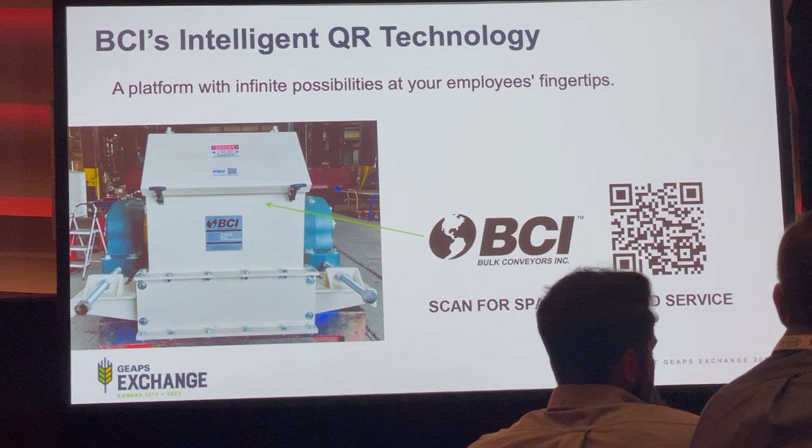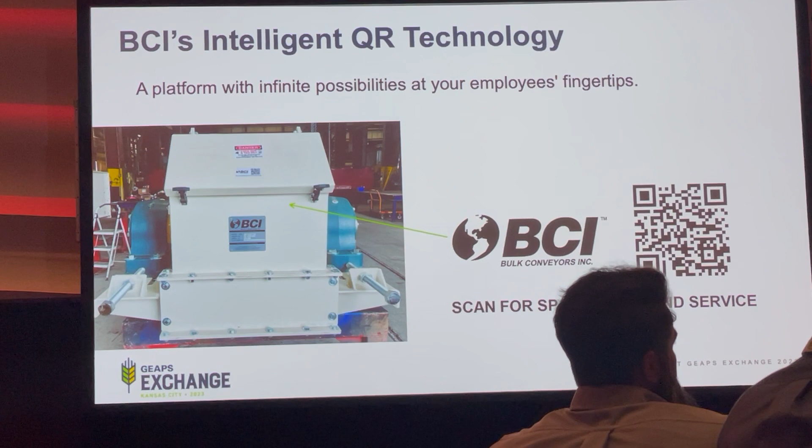Who hasn't seen a QR code recently? You're going to get inundated with them this week because every time you attend an ed session, go to the exchange floor, or leave this room today, there's going to be a QR code for a survey. We see them in restaurants, at the movies, and when we get our IKEA furniture, and that QR code takes us right to the assembly instructions.

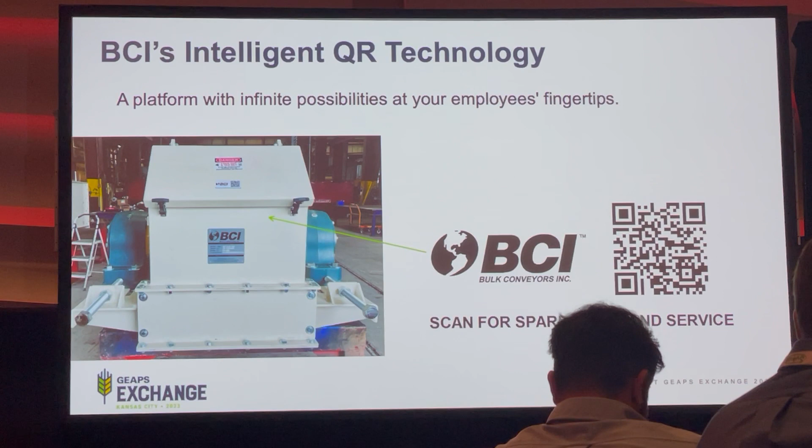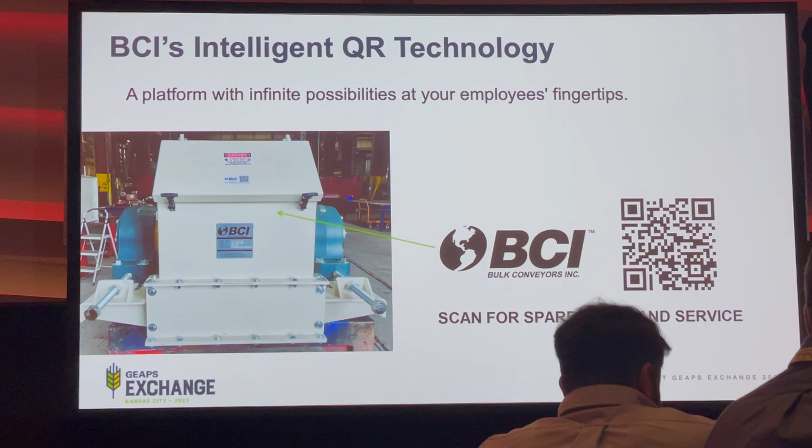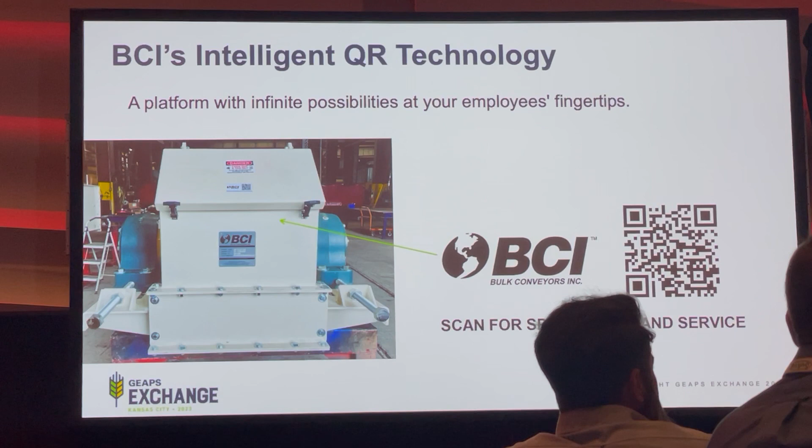Now we can do the same thing for conveyors. Every conveyor or bucket elevator that leaves our facility has a QR code put on it. We use a thermal imaging printer to create a very durable sticker that goes on the conveyor at the head and the tail. I know for some of you that's a challenge, you might say your facility will destroy that code. That's fine, we can always print you a new one. But once someone at your facility scans that QR code—maybe your installation contractor, maintenance guys, or someone doing a quality inspection—there's an unlimited number of things we can place under that code.

We can put equipment descriptions, equipment drawings, maintenance checklists, anything you could possibly imagine can be linked to that. We can personalize it for your company as well, it doesn't have to be our standard stuff. We do populate it with some standard things like lockout tagout, a sprocket wear description diagram, and some other safety checklists. We can also link the spare parts for that conveyor.

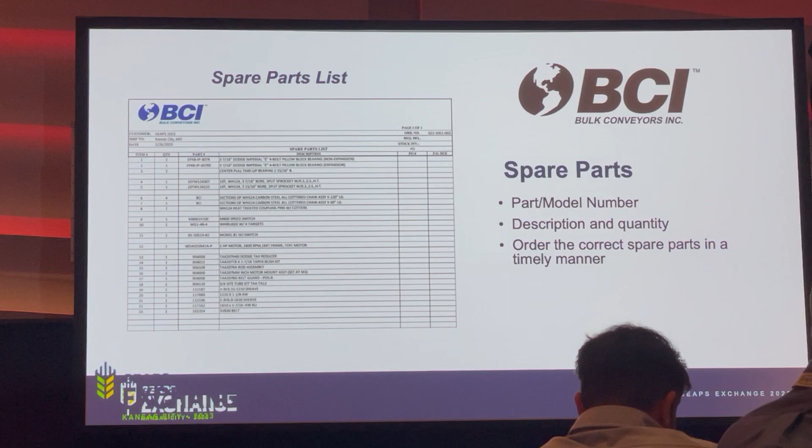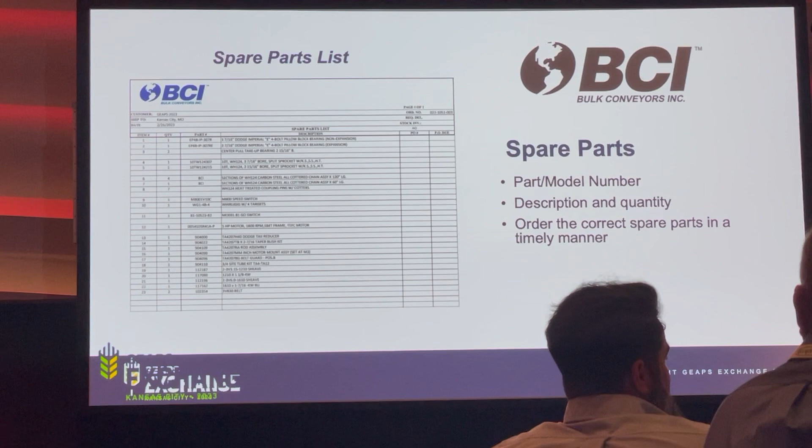So how convenient would it be for your maintenance manager? He's out there with a conveyor that's broken down, and he's got to climb down off that silo, go back to his office, pull up the drawing of the conveyor. No, all the information he needs is right there. He can do it all from the top of that silo, and if he's got his phone with him—we all have our phones unless we're working on extraction—he can see what parts he needs, who was the original manufacturer, and our phone number is right there. He can call into our parts department, tell them what he needs, and get it coming right away.

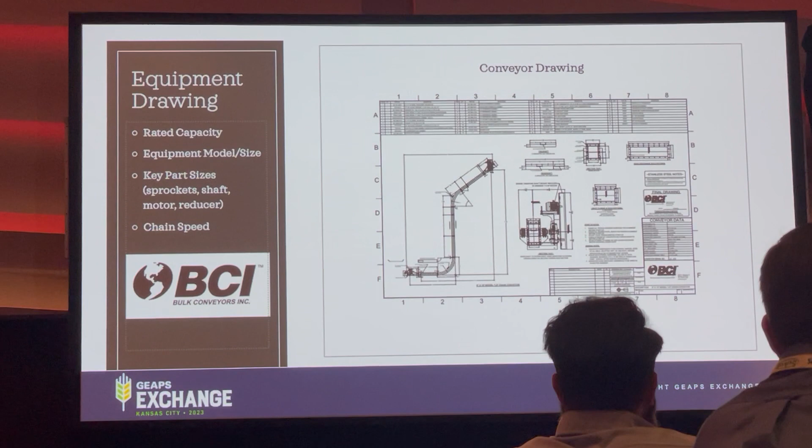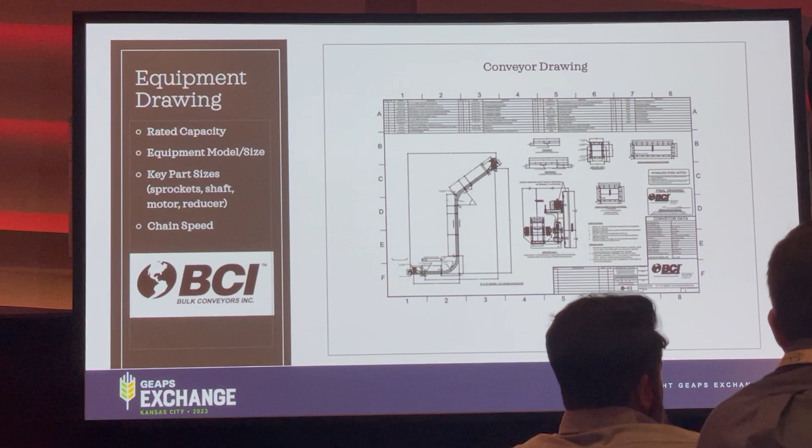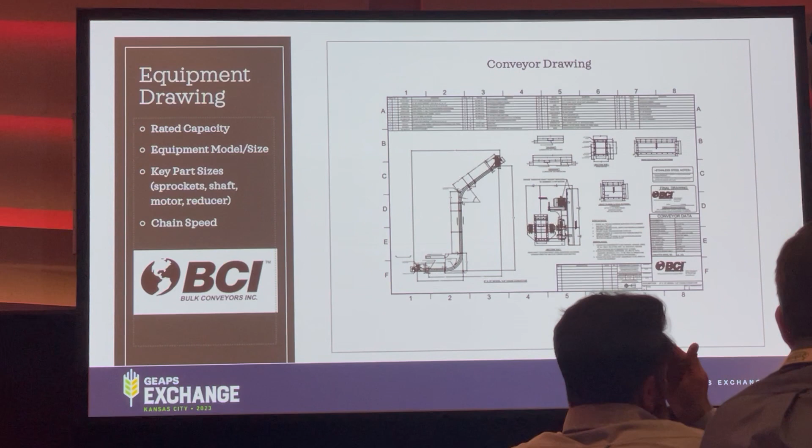We also put the final drawing of the conveyor in there. This is really, really important for installers in the field. You get a brand new piece of equipment, you're all excited, and then your installation contractor asks, how do I put it together? What are the steps? What's it going to look like when it's done? You don't have to worry about chasing drawings, going back to your office to print them out, or having the manufacturer send them. It's all right there in that QR code, accessible with the smartphone already in our pockets.